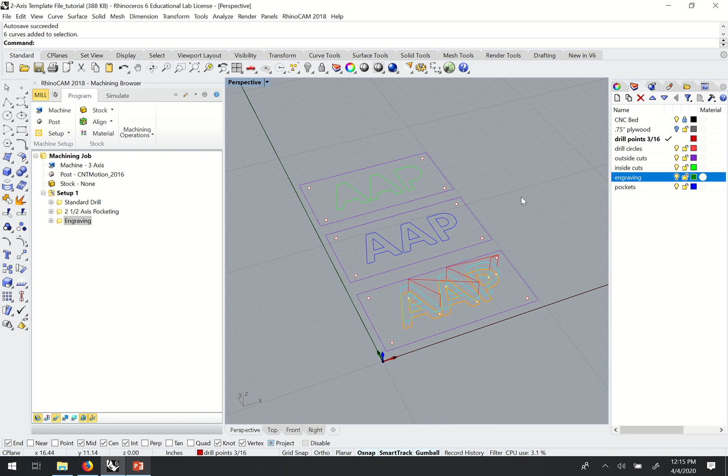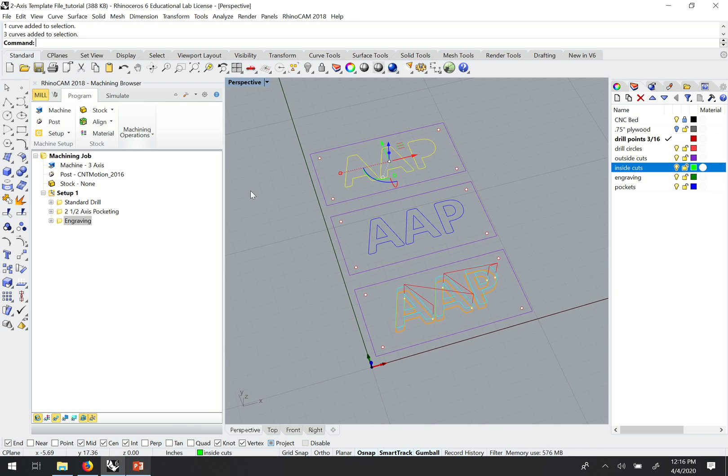In this video, I want to look at our inside cut operation up here. So I'm going to right click my layer, select objects, come over to machining operations, 2-axis, and for the inside cuts we're going to use the profiling operation. Once again, you see our regions here.

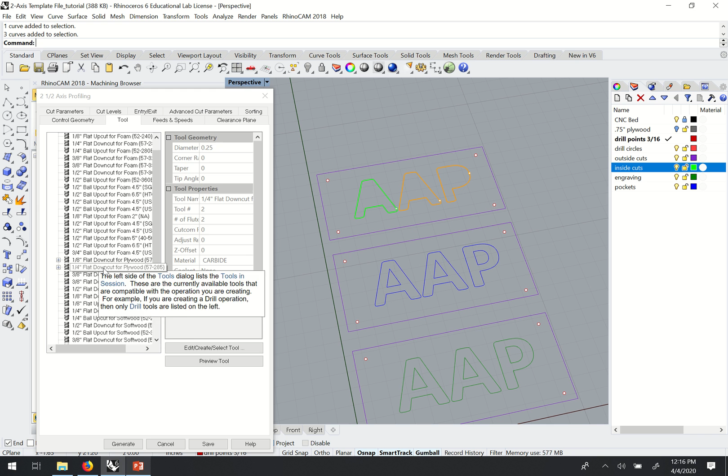For a tool, I'm going to go back to our 1/4 inch cutter, and I'm going to use that to cut out these holes once again, because I want to try to get the best definition I can for the inside radius here. I'm going to select that tool again, go to feeds and speeds, load from tool, clearance plane I don't need to adjust.

Under cut parameters, for the profiling pass, generally with a profiling it's going to be best if we have single closed curves. We want our curves to be joined, not grouped together, but joined together so that they form closed curves. We can cut individual lines with a profiling operation, but just like you see here in this example, on an open curve we can only cut either to one side of the line or the other,

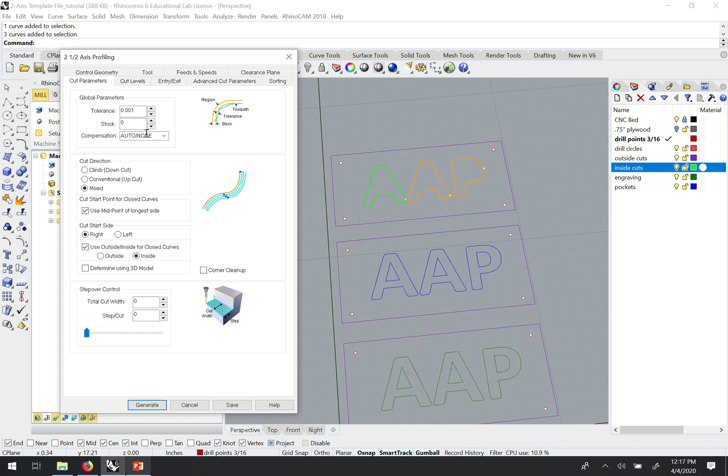but on a closed curve we can use this feature down here to decide, if we select this box with closed curves, we can say, do we want to cut on the outside of these curves or on the inside? And in this case, we want to be on the inside. That's all we need to set in this tab, and we can move over to the next tab.

Once again, for cut levels, I'm going to do pick top, enter in the thickness of my material. In this case we want to cut all the way through the material. So for our total depth I'm going to use 0.76. I'm actually going to go a little bit beyond the bottom of the material, just like we did with the drill bit. In this case though, I don't need to go as deep as I went with the drill bit because the tool that I'm using is flat. It doesn't have a pointed tip on it like the drill bit does. So if I just go a little bit below the bottom, I should get a pretty clean bottom edge.

I'm just going to click down in the finish depth, and you'll see that the full total depth goes into the rough depth again. And once again, down in the rough depth per cut, we want to break this up into levels based on the tool radius. So I don't want to cut more than the radius at a time. I have a 1/4 inch tool, so my depth per cut is going to be 0.125, 1/8 of an inch. So it's going to take several passes to get through this 3/4 inch material.

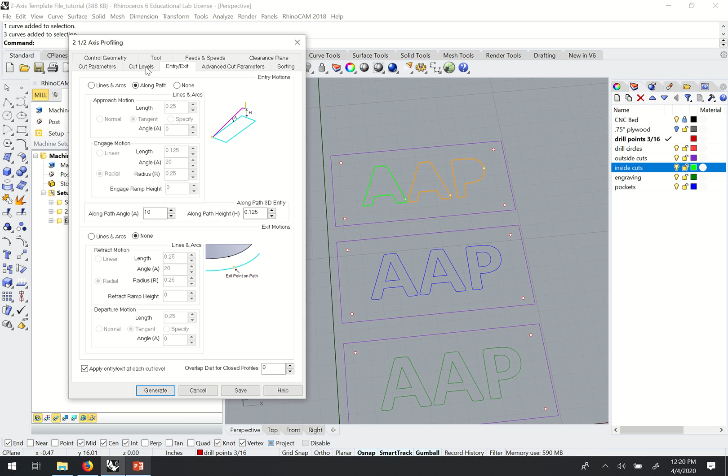Also, down here in the exit motion, you can see this shows you how it's going to exit. We don't want it to hook out like this. So what we'll do for an exit motion is click none, and that will just stop and lift straight up from a single point. And finally, down here in the bottom, just like with the pocketing, we want to check this box so that we use this entry motion at each of the levels.

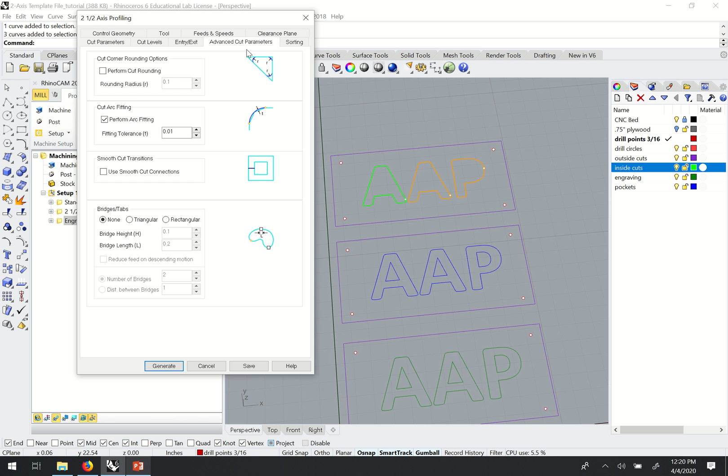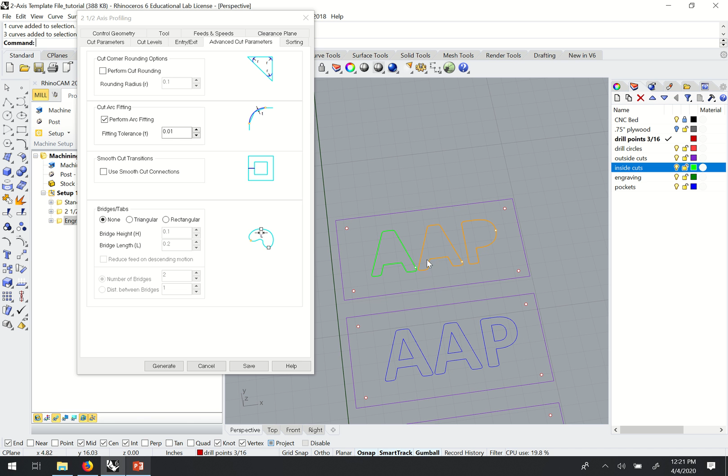Once again, we don't really need to worry about the advanced cut parameters or the sorting in this case. Except there is one thing that I can point out under advanced cut parameters. In here, these areas that we're cutting out are quite small. So there is a chance that as we cut out these shapes, that the leftover pieces become loose, start to vibrate, maybe get flung out of their spot here, and they come off the table or start causing problems.

So one option that we have in the profiling operation under advanced cut parameters is to add some little bridges or tabs at the very bottom of the part to hold on to the rest of the sheet and prevent those things from coming loose and getting in the way of the rest of the cutting that's going to happen. And that might be a good feature to add in this case because these parts are quite small.

So down here, if I choose rectangular bridges, these can be very small, so the bridge height will be how tall it is, the thickness of it. And so I can use a very small number, like a 1/16 of an inch. And the length can be pretty small, probably just a 1/4 of an inch or so should be enough to hold onto that part and keep it from really coming loose.

Down here we can set the number of bridges, and I would say that 2 would be a good starting point. Really this becomes sort of a judgment call and may change based on your material. So this is something where if you were going to do a lot of these, we would recommend and try to help you do a test to make sure that we get it right on the first one. And if we're cutting 100 of these parts, that we don't have to worry about parts eventually falling out as we get further into the cutting.

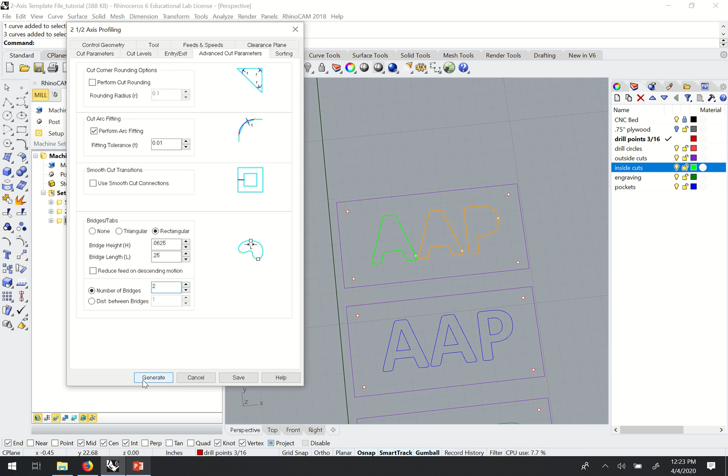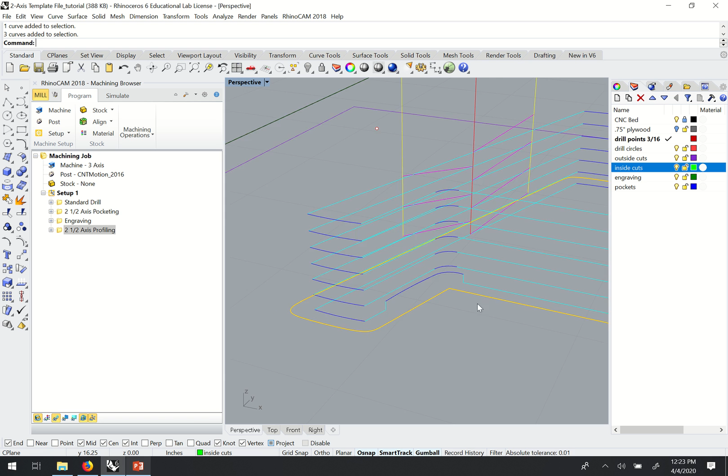So with that set, I'm going to just click generate. And you can see the preview here. So the tab is right here. This shows you where the machine's lifting up. And the other one's down here. So that's going around a corner, which will make it a little bit harder to clean that up in the end. So those tabs we'd have to manually remove after the cutting's finished, and then that'll leave an area where we have to sand or otherwise clean up when we're done.

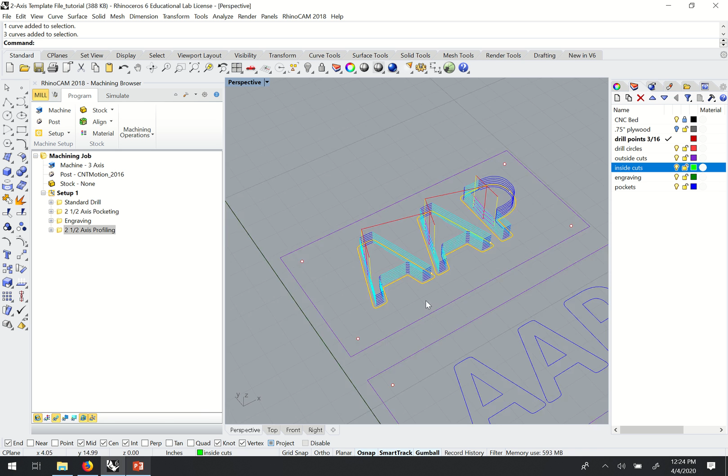So that's the basic setup of an inside profiling. I think in the next video we'll look at setting up the outside profiling, the cutout of these parts.